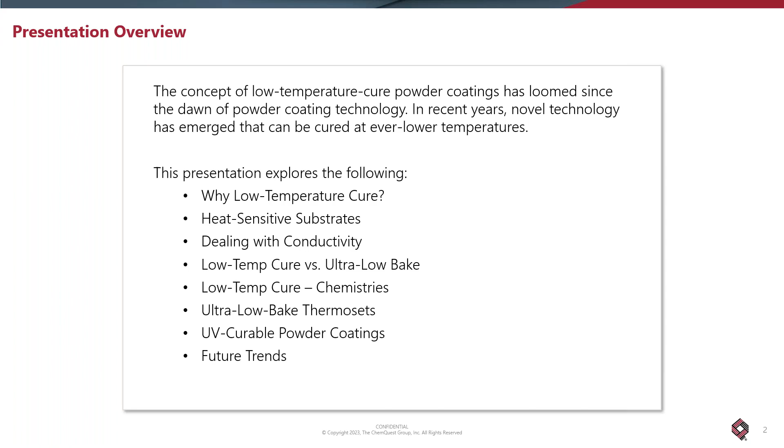So before I get started, I do want to mention ChemQuest. Like Heidi mentioned, ChemQuest acquired the Powder Coating Research Group, which I started in 2007, and it's all about powder coating technology and innovation. ChemQuest is a much bigger enterprise. It's been around for almost as long as I've been in the industry, a little bit longer, but they do everything from business consulting, strategic transformation, operational manufacturing efficiencies. They're your go-to when you're going to consider mergers or acquisitions in the specialty chemical, coatings and adhesive industry.

And the pillar that I fit into is the technology development. We have laboratories, not only the Powder Coating Research Group in Columbus, Ohio, we also have a very fully outfitted facility, not only with equipment, but with some really great experts in liquid paint and adhesive technology in South Boston, Virginia. So ChemQuest does have 2 different laboratories that are available to provide services to meet your needs. The technology development team works with everyone from advanced materials people, scientists, startups, traditional raw material suppliers, powder coating formulators, manufacturers, and certainly end users as well.

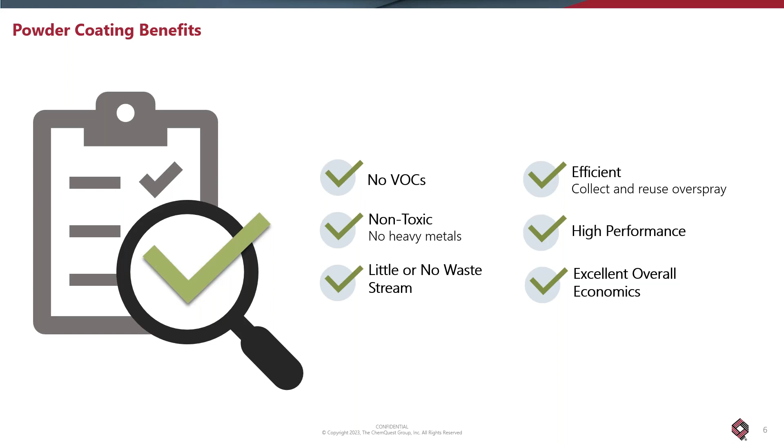The sum of all these great benefits or attributes is you're getting a darn good coating with excellent overall economics, and that's been fueling the growth of powder coatings since I was a young lad, getting started in the late 70s. But let's talk about low temperature cure.

When we talk about low temperature cure, where might be a good application to consider powder coatings that are capable of lower than traditional temperature cure? I've listed four different subsets for your consideration, and I'd like to go through these one by one to give you some ideas of where these things have popped up and where they certainly can be considered if they haven't been introduced.

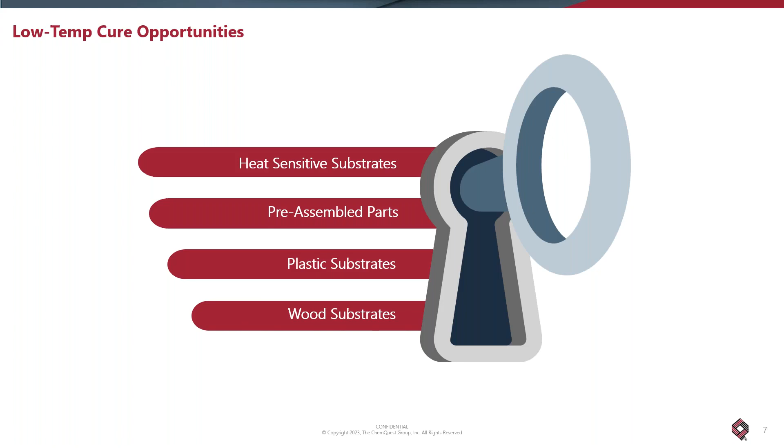Heat sensitive substrates, and let me talk about pre-assembled parts. Some people like to assemble their items and then apply the coating.

Truth be told, back in the 1990s, I was involved with the first UV curable powder coating commercialization installation. Believe it or not, it was a fully assembled electric motor line, in the eastern part of Oklahoma, for an electric motor company whose headquarters was in Fort Smith, Arkansas, right across the border from this one motor plant.

These were 1 horsepower type motors, plus or minus 1 horsepower, and the line was set up for a UV curable powder coating. So certainly pre-assembled parts can be considered. That being said, something with pneumatic or hydraulic type components, and things as simple as shock absorbers, suspension parts, items like that, could be considered for a low temperature cure powder coating.

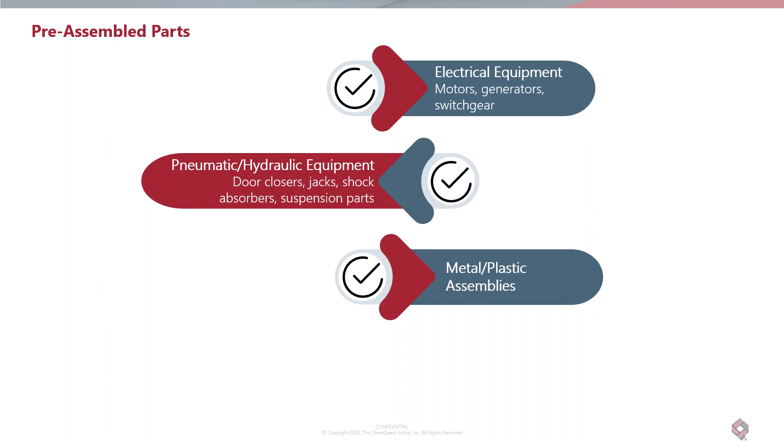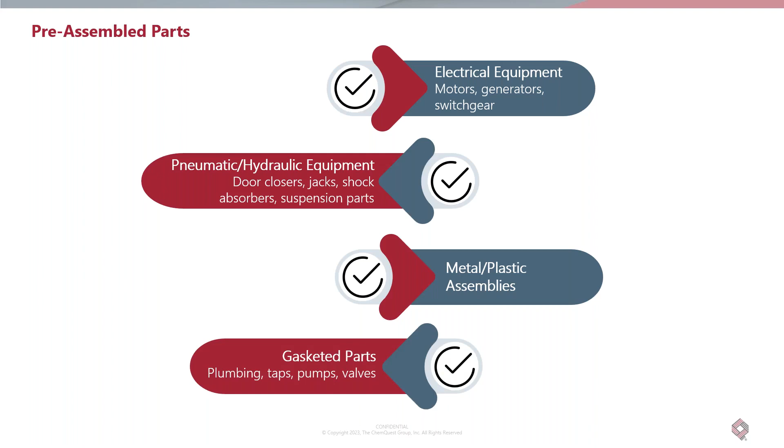Also, assemblies that have not just metal components, but metal-plastic assemblies, are another opportunity to consider low temperature cure powder coatings, and other things that may already have gaskets in them. They may be subunits or partially assembled. So these are parts that can be considered for lower temperature cure powder coatings.

Plastic substrates. I get this question where people say, can you powder coat plastic? Using that word plastic covers a very, very wide variety of materials. These are but a few of the ones that I've had some experience with applying powder coatings to. Determining what type of chemistry, what kind of formulation, what type of cure mechanism would be considered, you kind of have to look at what maximum temperature the plastic can endure without deforming.

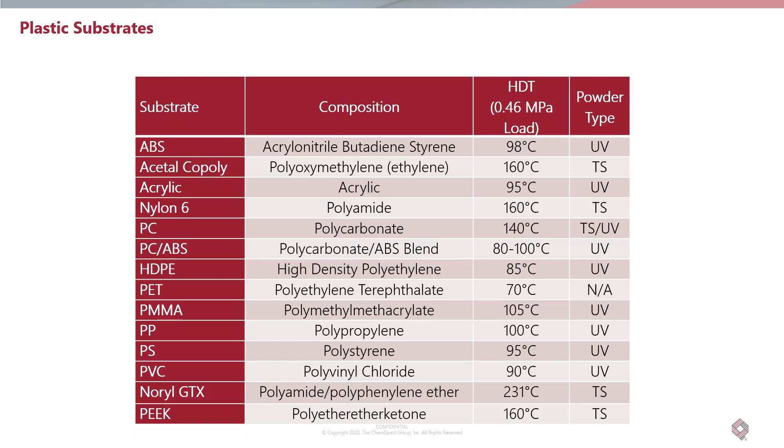And we do that by looking at the heat deflection temperature. The title of my presentation is 'more than just wood,' but I'd be remiss not to mention the different types of wood substrates that can be considered. Some of them are being powder coated today. Certainly medium density fiberboard has been talked about, and powder coatings have been commercialized for applications of medium density fiberboard since the turn of this century.

But you can look at high density fiberboards, you can look at wood composites, and even natural woods. From my experience, the close grain woods have a better opportunity or better possibility of being powder coated successfully. Open grain woods are a little bit too variable, which will make it very difficult.

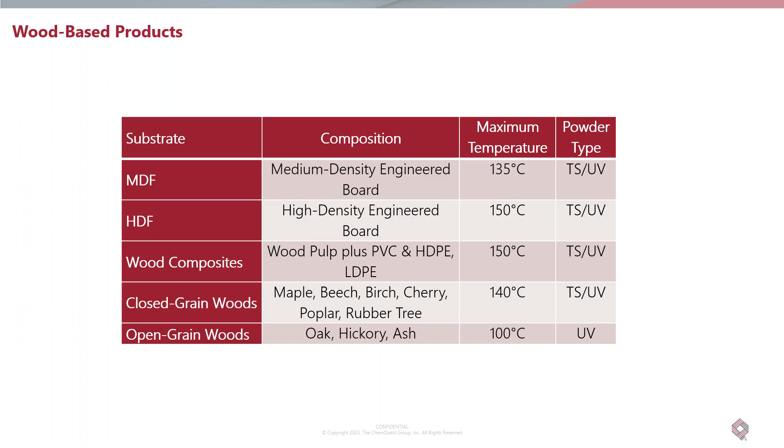Now, you say powder coating plastic. Traditional powder coatings are applied electrostatically to a conductive substrate that has a good continuous grounding or earth. So we've got to think about the application process: how do you deposit a dry powder coating onto a non-conductive or not so conductive surface?

I've done extensive work on this through the years. One concept is having some heating process at the tip of a spray gun that's propelling powder into a space. People have worked with thermal spray, which basically puts some type of flame arrangement at the exit of a gun, causing the powder to become molten, and the molten powder is directed toward a surface.

The problem with that is it's difficult to control thickness. You might be able to do this with maybe a thick film where the thickness isn't very critical, but it's not the best option.

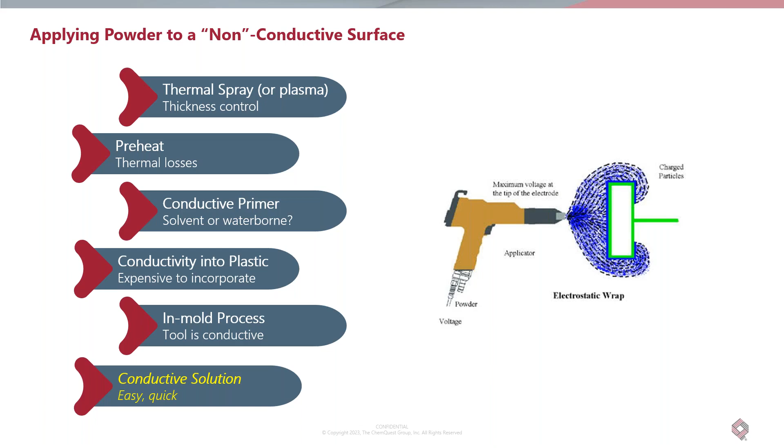The one I like is using a simple conductive solution, going way back into coatings technology history. There's a material called Ransprep, basically a solution of a conductive salt that can be applied to the surface. It flashes quickly and provides a nice, even conductive surface. Anyway, these are some possibilities you can use to make a surface conductive enough to apply powder to.

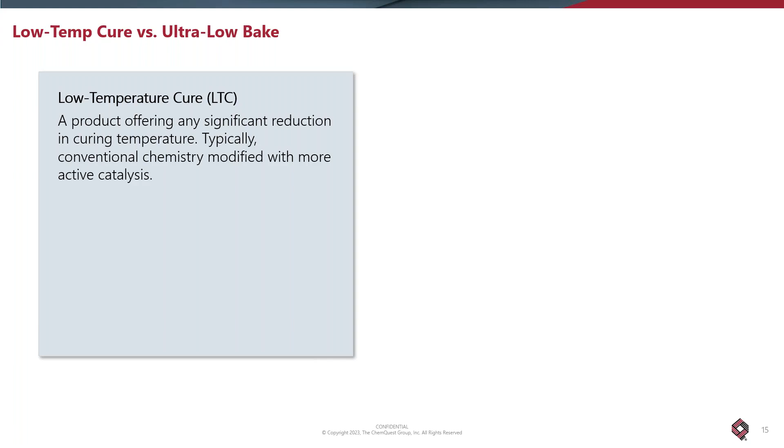Now let's do a little differentiating between low temperature cure and ultra low bake, because that's going to be the rest of the presentation. Low temperature cure is basically reducing the traditional bake temperature of powder coatings, which is typically somewhere between 175 to 200 degrees Celsius, by playing with the melt viscosity a bit, making a minor tweak, and adding more catalyst.

Basically, the concept is put more catalyst in—and I think anybody who's a fan of Saturday Night Live might know where I'm going with that one. So just adding more catalyst.

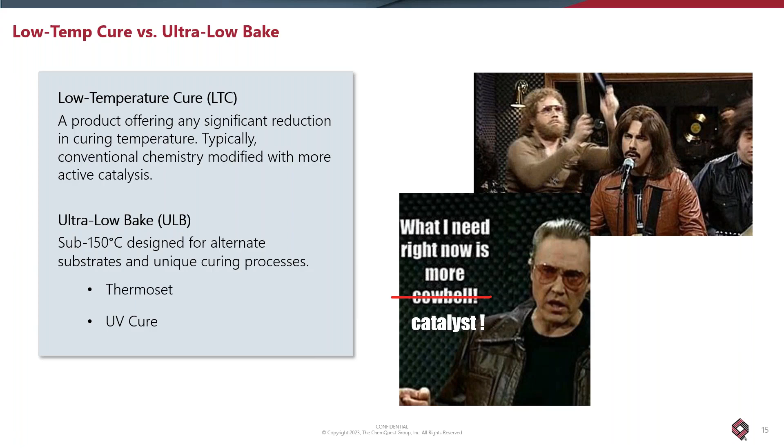When we talk about ultra low bake, we're talking about perhaps a different type of cure chemistry, a cure mechanism that's going to allow powder coatings to be applied and cured at temperatures below 150 C, maybe getting down into 120, pushing the envelope just below that. And you have two choices here, which I'll talk about: thermoset and/or UV cure.

Low temperature cure chemistries—here we're going to talk about this from a formulator's perspective. I'm going to go through the traditional powder coating chemistries and give you examples of how you would approach formulating a reduced temperature powder coating cure mechanism.

Here's a little cheat sheet showing standard cure of powder coatings: dwell times anywhere from maybe 5 to 20 minutes, but traditionally in that 15 to 20 minute range, with cure temperature ranging from about 175 to 200 C. Simple adjustments to the binder system can get you down 20 or 30 degrees Celsius lower in temperature, and I'll give you some examples.

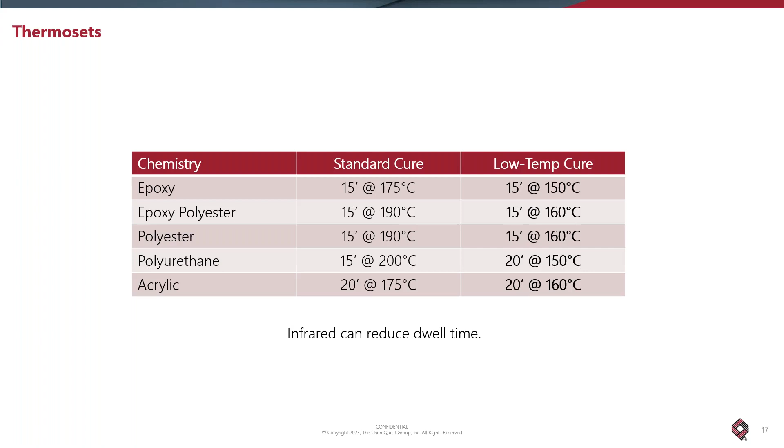In these cases, when you see these types of temperatures, often the driver is a reduction in energy costs, as opposed to getting into less traditional substrates like the ones I mentioned just before.

So if we want to look at low temperature cure epoxies, look at a slightly lower melt viscosity epoxy and incorporate or increase the catalyst level. In epoxy powder coatings, imidazoles are very common catalysts. They work well, and most of them are solid.

You can also get curing agents that are pre-made, pre-catalyzed. An example here: some phenolic curing agents where the KD404 is fast cure. The supplier of these curing agents is just putting in a dose of imidazole catalyst to make it cure faster and at a lower temperature.

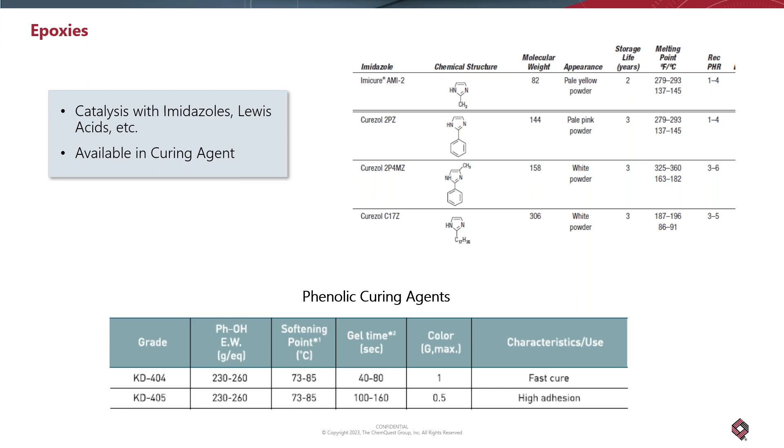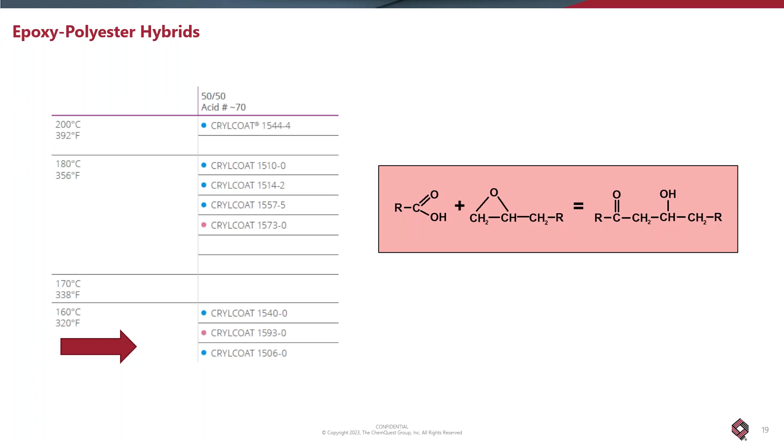Now, epoxy polyester hybrids—this is one where our friends at the polyester resin companies have done a nice job introducing pre-catalyzed, lower melt point, lower melt viscosity type polyesters. You marry those up with a corresponding lower melt viscosity epoxy resin, and you've got something that's going to cure nicely at the 160 degrees Celsius range.

In the polyester world, curing agents in powder coatings are TGIC or HAA, also known as Primid. Again, the polyester resin people have provided an easy way for you to lower the cure requirements for the finished powder down to 160. This is easy peasy, my friends.

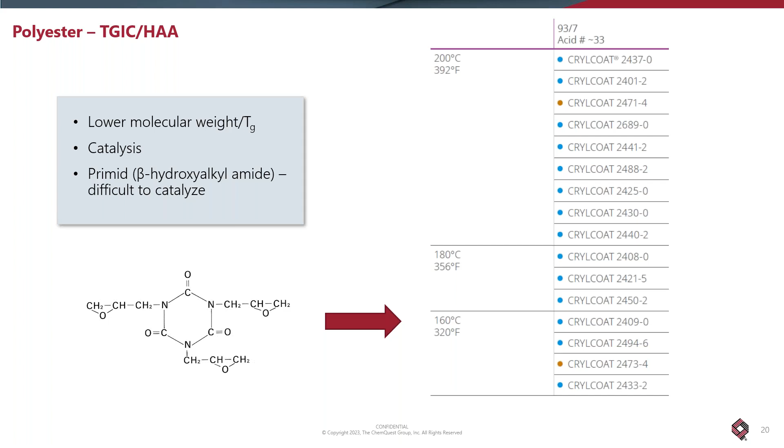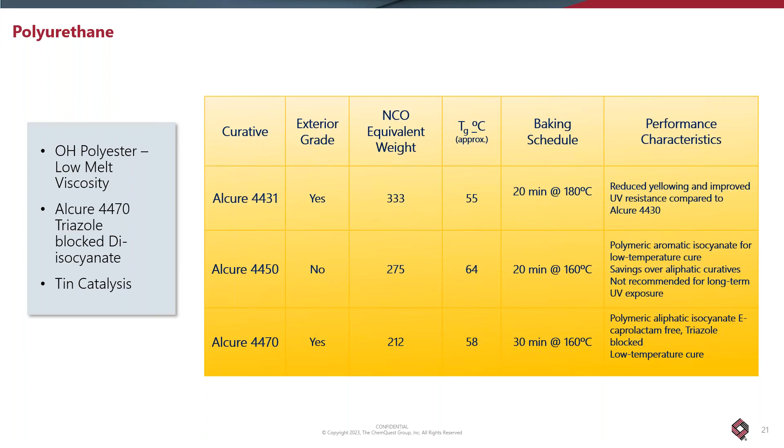Polyurethanes—when you're trying to lower the cure temperature of a polyurethane in powder coatings, urethane curing agents rely on a blocking agent. The suppliers of the diisocyanate curing agents have alternate type blocking agents that are released in that 150 to 160 Celsius range, which give you an opportunity to formulate a lower temperature cure urethane, at a price, of course.

GMA acrylics are a smaller representation of the powder coating world, however high performance. You find GMA acrylics very commonly used for automotive type trim parts, alloy wheels, things like that. But the GMA acrylic resin manufacturers have done a really nice job driving the polymer architecture into a space where you can do a lower temperature cure, lower melt point with their products.

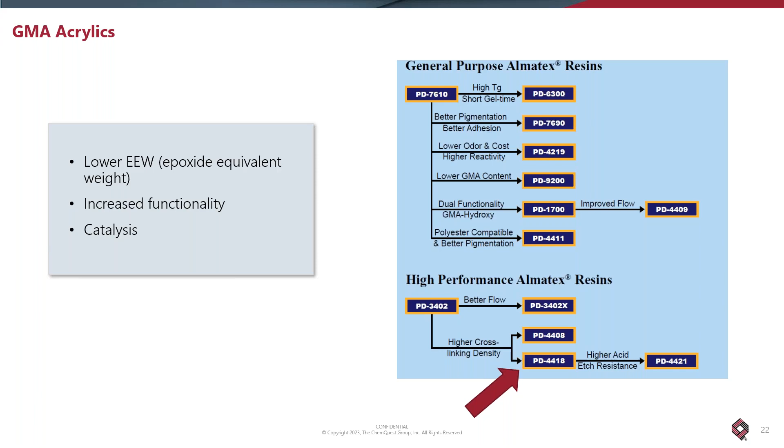All right, let's talk about the ultra low bake stuff—the stuff that's going to give you the ability to cure below 150, and maybe sneak up on that 120 degrees Celsius, with some caveats attached to that chemistry.

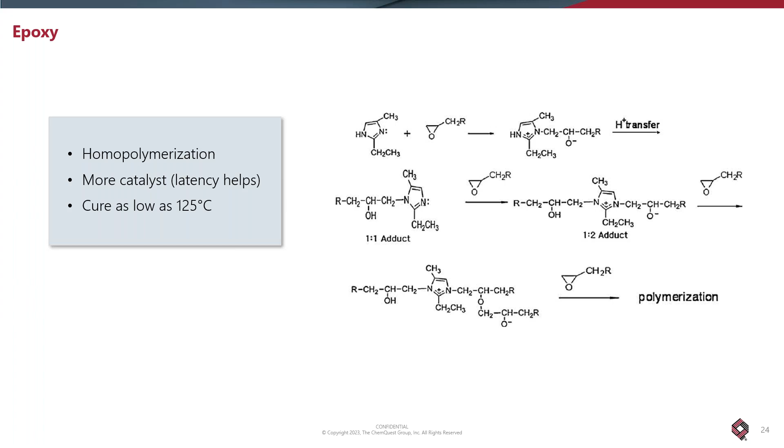With epoxies, it's a matter of driving the cure down. With epoxy chemistry, and this is Bis-A type epoxies in particular, you've got a homopolymerization route you can do, and surprisingly, you can do this with imidazole catalyst, and it works. It's a pretty hot system—you've got to be careful—but we can drive the cure temperature down into that lower range of about 125 Celsius.

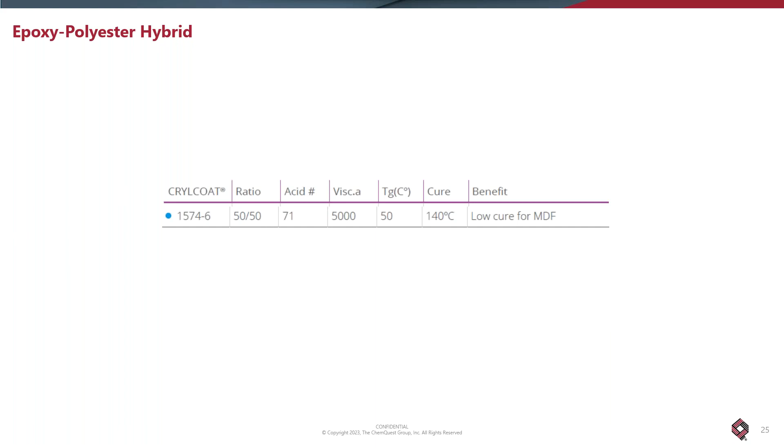Hybrid, it's kind of the same, a similar type proposition. In this case, there's a very low temperature cure, low Tg polyester resin that was designed for the powder coating formulator by the polyester supplier. This is about as low as you're going to go with this type of chemistry.

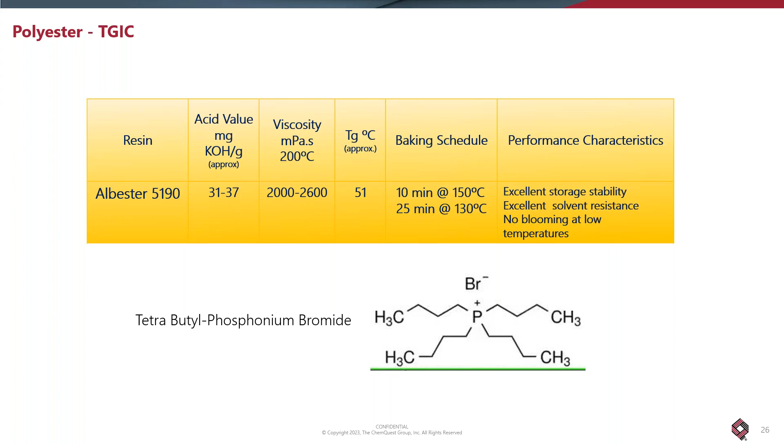TGIC—again, it's a combination of getting the right rheological behavior at these lower temperatures. So basically you need a decent melt point and also a relatively low melt viscosity at this 130 to 150 degrees C range, and then you utilize some clever catalysis. This TBPB type catalysis system seems to work quite well. It's got a little bit of latency, and it's pretty quick at this sub-150 temperature range.

GMA acrylics—we can take the lower cure GMA acrylic polymers and use a special curing agent. Traditionally, GMA acrylics are cured with a diacid, which allows them to cure between 150 up to maybe 160, 170 C, depending on the polymer and catalysis. There's a polyanhydride-specific curing agent that allows you to drive the cure of these GMA acrylics below the 150 mark, and it works quite well. That curing agent is somewhat crystalline.

When we're talking about materials morphology, molecular morphology, usually things aren't 100% crystalline, 100% amorphous. This one's more towards the crystalline side, and it does aid in getting good melt and flow at these lower temperatures.

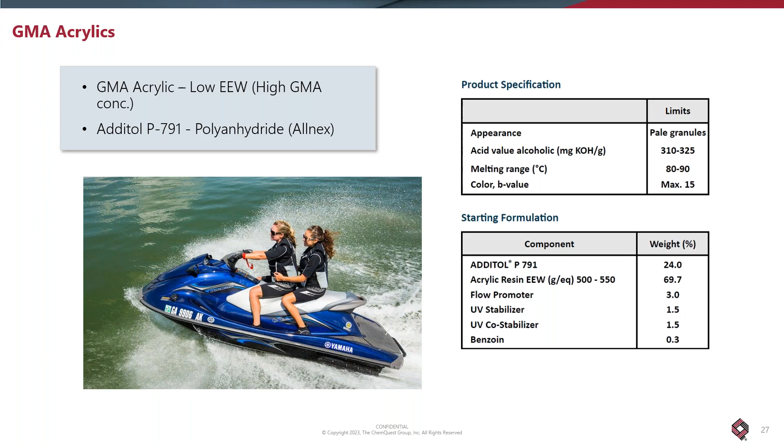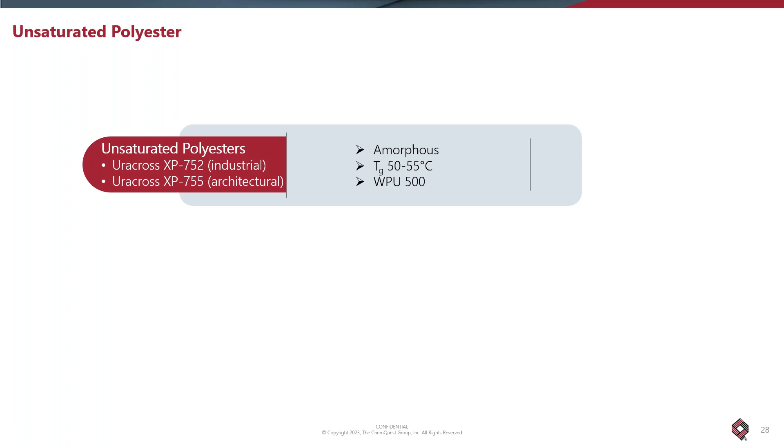Here's a system that's pretty much just used for low temperature cure applications in powder coatings. It's based on unsaturated polyester, similar to what you'd see used in a lot of composites, fiberglass reinforced plastics. But you basically use a maleate unsaturated polyester that's been designed to melt and flow at these low temperatures.

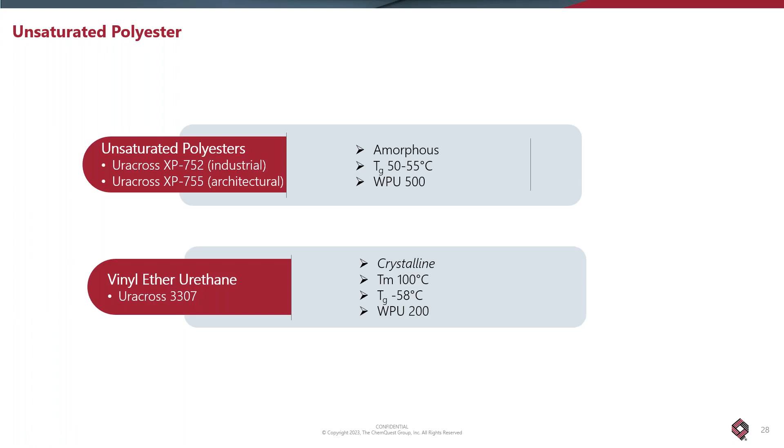You cure that with a vinyl ether urethane, which gives you a really nice cross-link density. This vinyl ether urethane is also a relatively crystalline material, and it gives you a nice thermoset system that you can use a peroxide catalysis system to make work. It's been available for probably about 15, 20 years, believe it or not. It's some pretty interesting and, I'd say, non-traditional chemistry for the powder coating world.

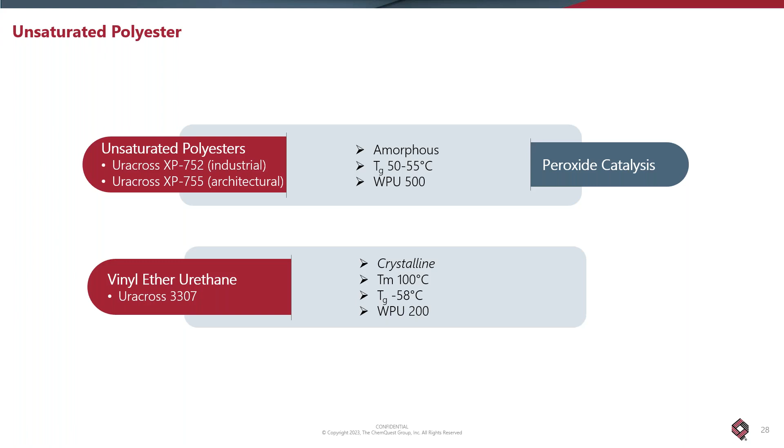Here's one that is still kind of in the starting blocks, and it's a really, really interesting chemistry. It's a product that was designed by Battelle Memorial Institute. They had a project to do a bio-based polyester—well, actually a bio-based polymer—specifically designed for powder coatings. They've published this, I think, in Coatings Tech, and I know they've given a presentation at one of the American Coatings shows a time or two ago. But this stuff is really interesting.

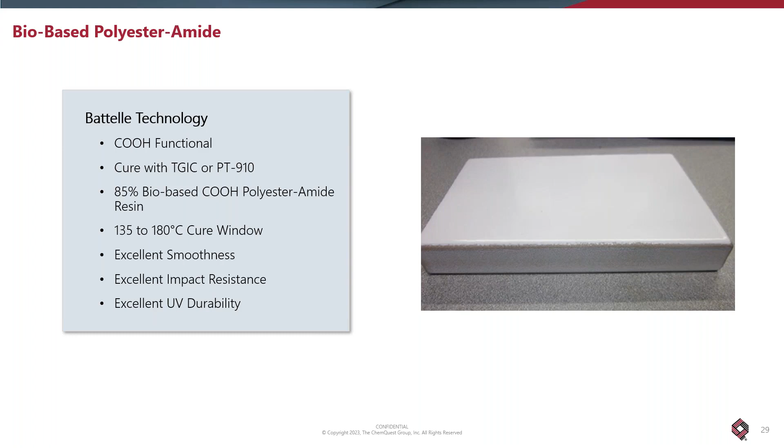It's an 85% bio-based carboxyl polyester. It's a long chain diacid that's been synthesized using high oleic soybean oil. It's like a C18, C19 type architecture. Anyway, this stuff can cure with TGIC down to about 135 C, and it gives some pretty amazing performance. It's relatively aliphatic, gives excellent impact resistance, but the one thing I didn't quite expect out of this project is it gives some pretty incredible UV durability as well. It's probably not as surprising as it should be, because it's a relatively aliphatic polymer. So that's something you can think about.

When we're talking about low temperature cure, you know, as a formulator, as a chemist, as a material scientist, it's fun to develop these things in the laboratory and do application studies under lab conditions, but introducing it out to the real world, it brings some hurdles that have to be overcome.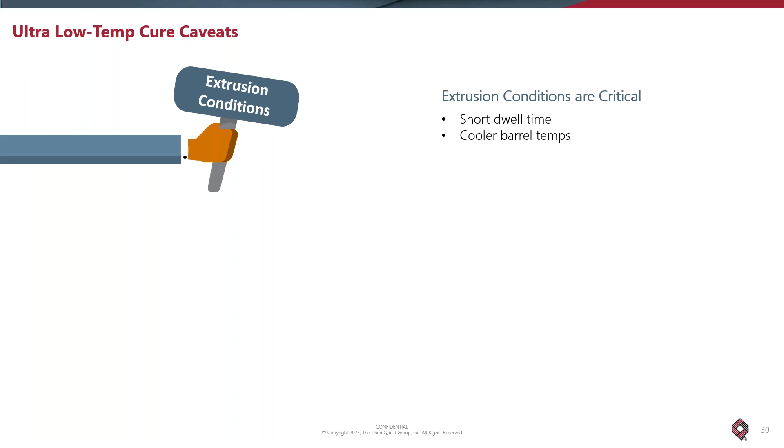Storage stability is something you've got to watch. When you start driving down the melt point, the T sub G, you're getting down into—you're flirting with 50 degrees Celsius as a T sub G. You've got to watch your transportation, you've got to watch your storage and your application system conditions. So it's just something you've got to look at. Thermosets in particular may advance in the solid phase if they're exposed to high ambient temperatures. So it's something you really have to pay attention to with handling these types of chemistries.

Application—and again, this is where we're driving down the melt behavior of these powder particles—we have an issue depending on how your application system is designed. We're propelling a powder-air mixture through tubes and a spray apparatus, which has a certain velocity of the particles. And if you're not careful, if the temperature gets a little too high, you can get impact fusion on the inside of the application equipment, which is definitely a problem.

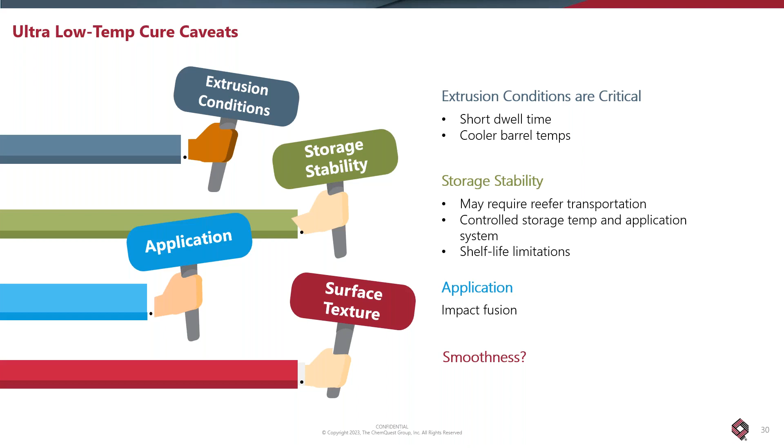All right, we're going to wind this thing up. We're going to wind things up with a little discussion on UV curable powder coatings.

My experience with UV cure powder coatings goes back to the mid-1990s, and through the years I've done a lot of work in this area. I think I might qualify for membership into the UV curable powder coating maniacs society, but I'm not sure, I'd have to ask an independent source that question.

If we want to compare it to a thermoset powder coating process, basically powder is applied to a substrate with a thermal cure. You heat the substrate, you heat the coating, you kick over the cure mechanism, and you get your melt flow and hardness, and your part's coated.

With UV cure powder coatings, you separate the cure mechanism from the heat, basically. You're going to rely on ultraviolet light to get the cure.

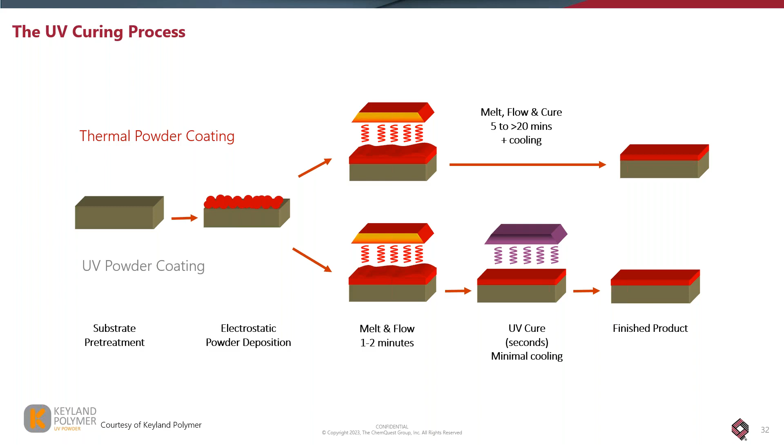So basically you're going through the same kind of application process. If it's an unusual substrate, you may have to look at that conductivity question, but you're applying some energy, typically infrared, maybe a combination of infrared and convection, to get your melt flow and film formation, which can happen quite rapidly. Then you expose that warm temperature film to the right delivery dosage of UV energy, and you've got your coated product at a relatively low temperature cure.

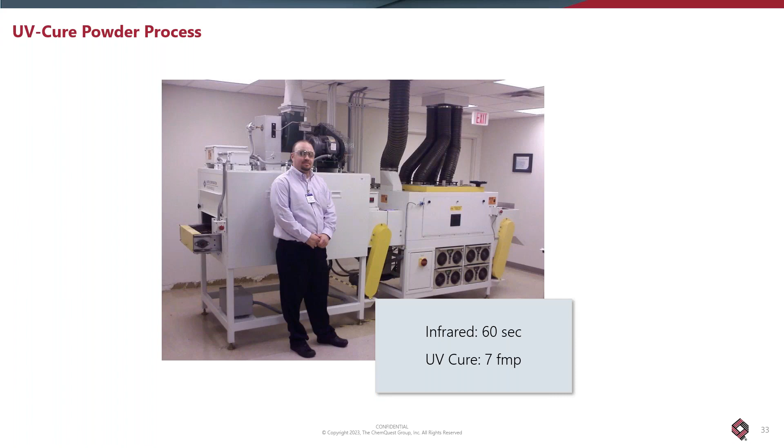Here's a picture of a UV cure pilot line I used to have in my lab, with one of our lab technicians. Basically this was a 60-second flat line infrared, followed by two banks of 600 watt per inch UV cure lamps, emitters. We did this at a line speed of about 7 feet per minute and got complete cure of a nicely formulated UV curable product.

So when you look at UV lamps, you don't want to get too much into the engineering side of it, but depending on the wavelengths of the lamps, it's going to kind of dictate how you do your formulating, specifically with free radical cure and the photoinitiators that are excited at the specific wavelengths that these different lamps can deliver.

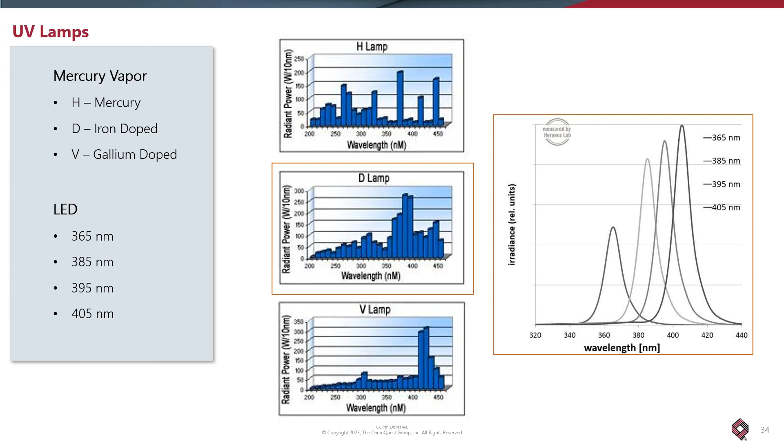When we look at this whole concept of which lamps work best, I'd borrow this from a page of the liquid UV cure people and technology. Standard mercury works quite well for clear coats. As you get into metallics and pigmented ones, it's better to use photoinitiators and proper pigmentation that allow excitation of the photoinitiators at relatively higher wavelengths, kind of approaching the visible light range.

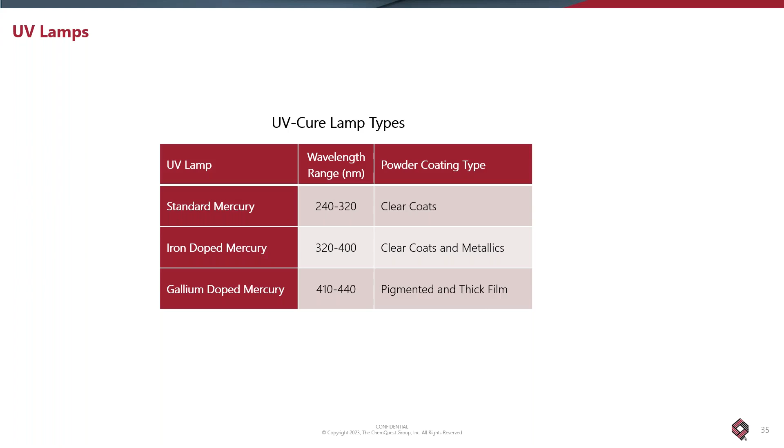Powder chemistries, I'm only going to talk about free radicals. There is a subset of cationic cure, but that's for another discussion, we could do that offline. Basically, we're talking about a photoinitiator that gets things rolling after you've melted and formed a film of the powder.

You get your chain growth polymerization of your free radical groups. There's a possibility of oxygen inhibition, although for some reason the polymers and systems used in powder coatings don't seem to have much of a problem with that, and I'm not exactly sure why.

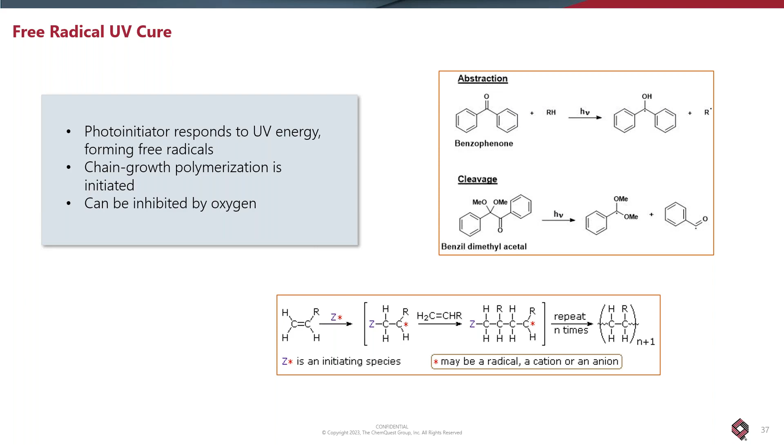The chemistries that are available form a fairly limited formulator's toolkit. However, there are materials available—specifically methacrylated polyesters, solid polyesters, solid epoxies, and a urethane oligomer which is available. You don't have a lot of choices here, my friends.

But it gives the formulator the opportunity to play with different chemistries in the formulation to get different performance profiles of the finished cure. So basically, you use methacrylated solid polymers to build your coating performance.

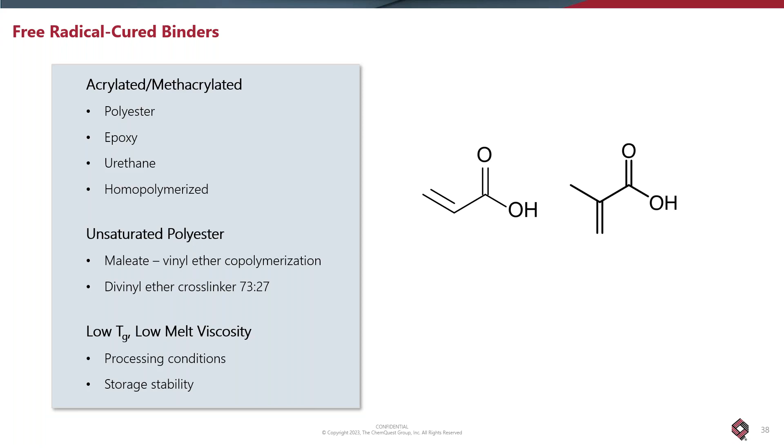You can also use the peroxide cure solid system, a solid polymer system based on the maleate and the divinyl ether. That one works, and basically we're doing low Tg, low melt viscosity type polymers that have these functionalities.

Benefits of UV cure: I mentioned it separates the melt from the cure, so you don't have cross-linking in the extruder, you don't have to worry about that. You don't have chemical reaction in transportation or in storage—you have to get that intense UV light to get advancement. It's a relatively small footprint.

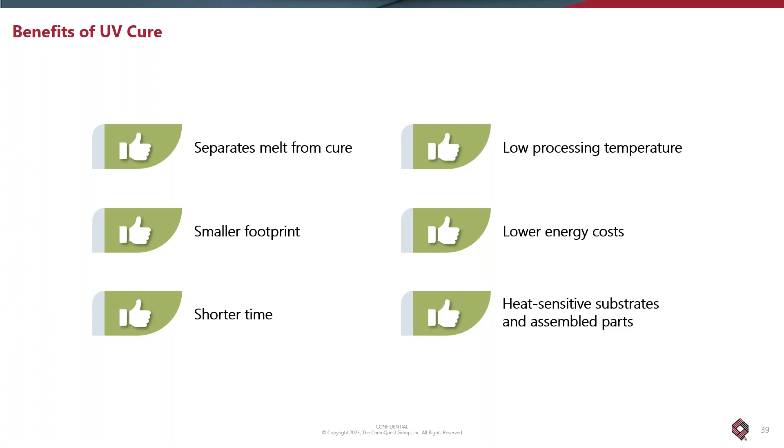You can do it all in a pretty small space, a short production line, a short finishing line, short time frame, low processing temperature, low energy costs, and it really can be a good option for substrates that can't take temperatures beyond say 125 to maybe 140, 150 Celsius.

The drawbacks: it's line of sight cure, limited selection of raw materials—we've got to work on that as an industry. There's a capital expenditure to build a unique new line. Pigmentation is a challenge, but anyone who's formulated UV curable materials knows it can be done. Film thickness is something that has to be controlled carefully. Transportation and storage stability are going to be issues, with the possibility of sintering if you get above the Tg of the material.

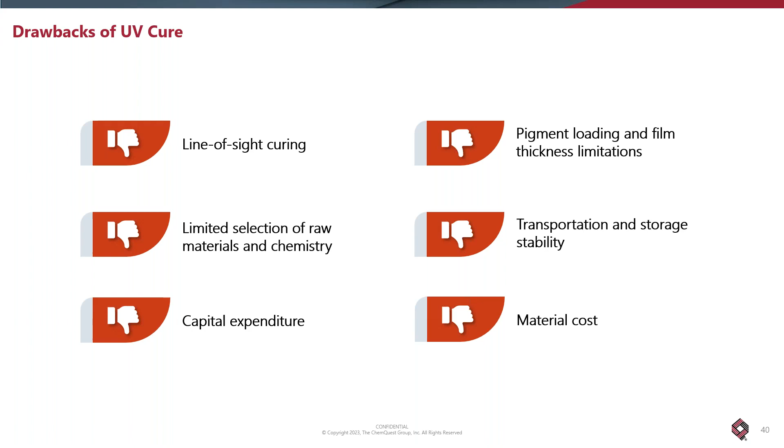You can't forget material cost. These things cost more than your garden variety materials that you formulate, traditional thermoset powder coatings. So it's something that's part of the package. So if we want to summarize things here...

UV cure versus a thermoset ultra low bake: UV cure gives you really that lower temperature, shorter cure time, small footprint. The thing about ULB ultra low bake thermosets, they're easy to pigment. The film thickness is not going to be critical. It's relatively low energy use. The equipment's more standard. It's an easier jump to go from traditional standard baked powder coatings to a fast cure or a low temperature cure thermoset.

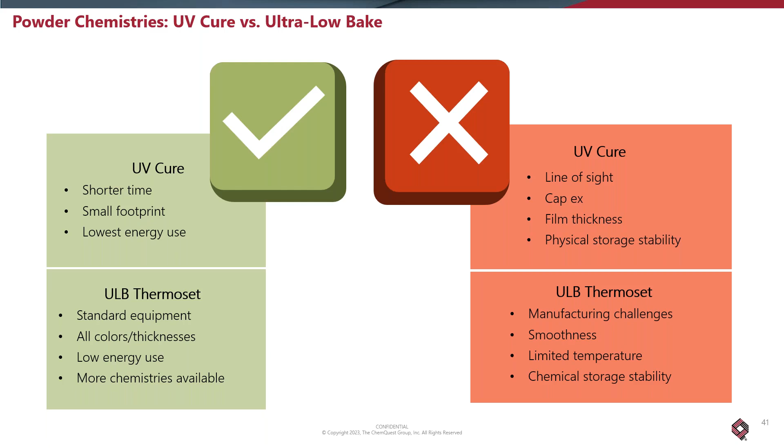Like I mentioned with the UV cure, it's line of sight, film thickness, physical storage stability. Sometimes you're in a first adopter type situation. With really low temperature thermosets, it's more in the processing of the powder coating through the extrusion process where you really got to watch what you're doing.

Future trends, and we're kind of running out of time, my friends. So we're gonna wind this up.

A couple of things going on. Just in the last 6 to 9 months, Allnex introduced some interesting kind of non-traditional chemistry for a powder coating system. And this basically, it's malonate type chemistry. It's real Michael addition. I have a reference to the world patent, which was granted, I think it was in November last year. It's some fascinating chemistry.

And I'm not saying it's going to change the world, but it's kind of encouraging because it is new. It's kind of cool chemistry. And, for you chemistry nuts out there, it's something to take a look at. I don't believe it's commercial yet, but you can contact the people at Allnex and I think they can give you an update.

The other thing that I've been seeing more and more, powder coatings, these ultra low bake powder coatings in particular, they're starting to filter into composite type parts applications, molded plastics, and it's just a matter of getting the industry to make the change and to convince them.

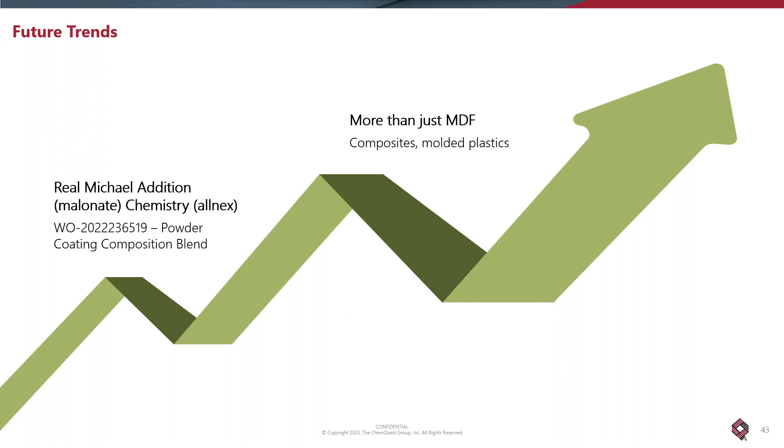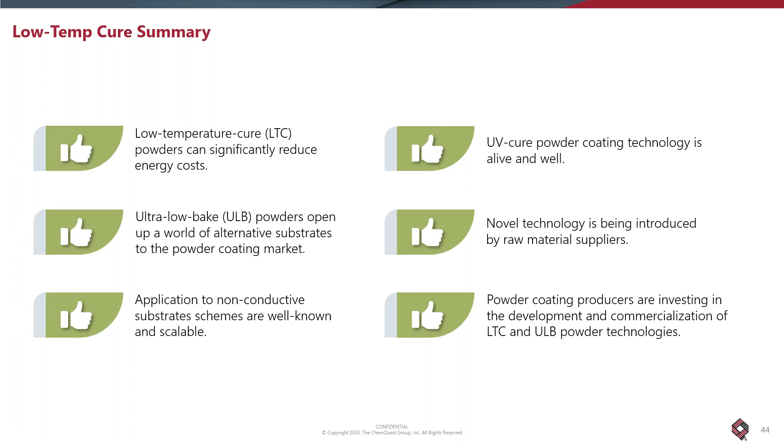So low temp curing, it's something that is here to stay. A lot of good things happening. I would recommend people jump on the bandwagon and get some good minds working on moving this forward. And I think it's going to be a win-win-win for all parts of the supply chain, and eventually, to the ultimate consumer.

I'm going to turn this over to Kevin, pardon me, it's Marcus.